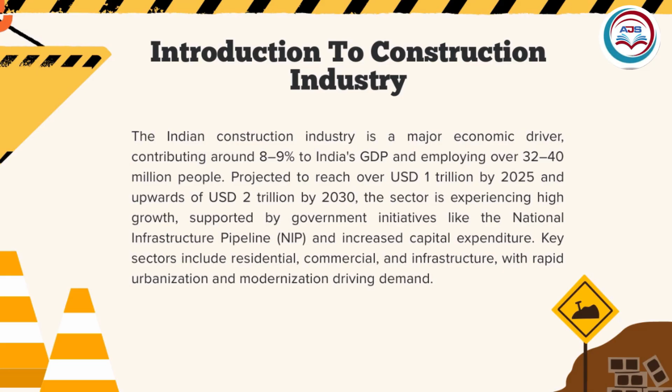Government programs like the National Infrastructure Pipeline are fueling this growth, along with rising investment. Residential, commercial, and infrastructure projects are all booming, driven by rapid urbanization and modernization across India. Let's break down the key subsectors of the construction industry.

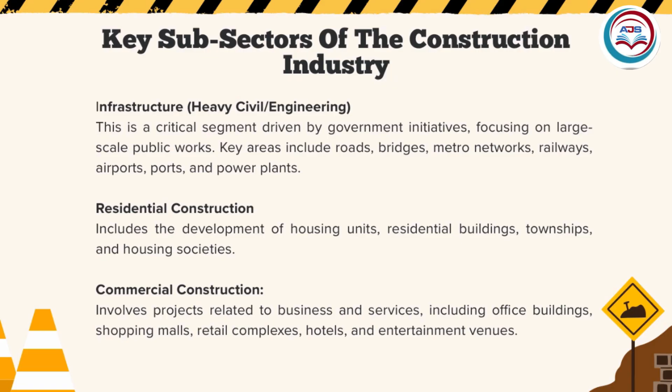First, infrastructure. This is the backbone of public development, driven largely by government projects. Think roads, bridges, metro systems, railways, airports, ports, and power plants. Next, residential construction, where we build homes, apartments, townships, and housing communities. Finally, commercial construction, covering spaces for business and services, like office buildings, malls, hotels, and entertainment centers. These three areas shape the built environment we live and work in every day.

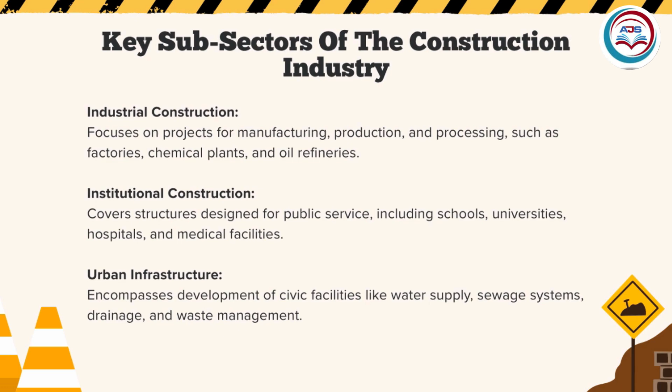Let's break down the key subsectors within the construction industry. First, industrial construction. This is all about building facilities for manufacturing and processing, like factories and chemical plants. Then, we have institutional construction, which focuses on public service buildings, schools, hospitals, universities, and medical centers. Finally, urban infrastructure covers the essential civic systems we rely on every day: water supply, sewage, drainage, and waste management. Together, these areas shape the built environment around us.

When we talk about the role of a helper mason, it's all about supporting the core tasks on site. That means mixing cement, mortar, and concrete with precision, following instructions to the letter. It also involves handling materials, loading, unloading, and stacking bricks, blocks, tiles, and stones close to where they're needed. Preparing the site is key too, clearing work zones, dressing soil, and setting up or taking down scaffolding safely.

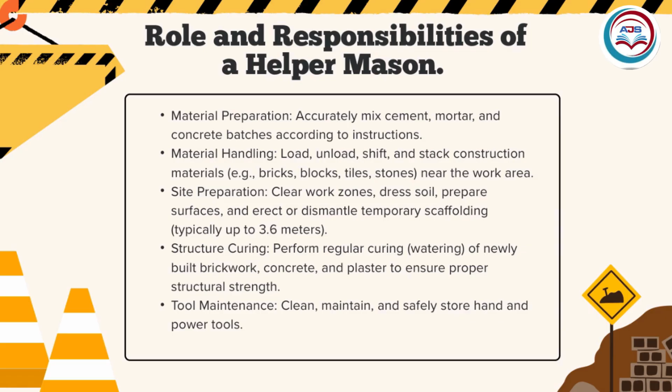Then there's structure curing, which means regularly watering new brickwork and concrete to build strength. Finally, keeping tools clean, maintained, and stored safely rounds out the job. It's a vital role that keeps everything running smoothly.

Let's get familiar with some basic brick and block terms you'll hear on any masonry site. A stretcher is a brick laid flat, with its longest side facing out. A header shows the shorter end on the wall's face. Then there's the soldier, a brick stood upright, often for decoration or arches. The frog is the little indentation on top, helping mortar grip. A bat is just a broken piece of brick, and quoins are those big, strong corner bricks that finish off the edges.

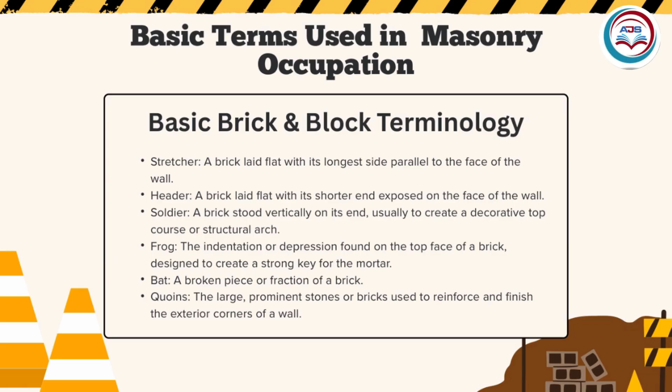Let's break down some basic terms used in masonry, the language of building with bricks and stones. A course is simply one horizontal row of bricks or blocks, all laid in mortar. The bed is the fresh mortar layer beneath each course, where the bricks rest. Then there's the bond, that's the pattern bricks follow to lock together, avoiding straight vertical joints. A wythe is a single vertical thickness of masonry, and a corbel is a stepped projection that juts out to carry weight above. These elements shape how walls stand strong and last.

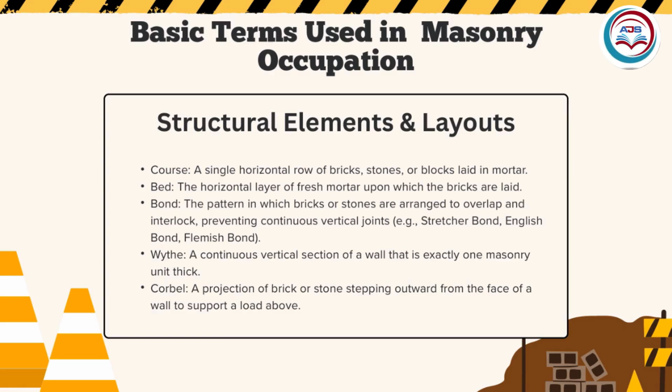Let's break down some key terms that are essential in masonry work. Mortar is the paste that holds everything together, a mix of cement, lime, sand, and water. Grout, on the other hand, is much more fluid, used to fill gaps inside hollow blocks and around steel reinforcements. Flashing is a thin layer of waterproof material that helps keep water out by directing it away from the wall. Weep holes are small openings left intentionally to let trapped moisture escape. And finally, efflorescence, that white, powdery residue you sometimes see on walls after water dries.

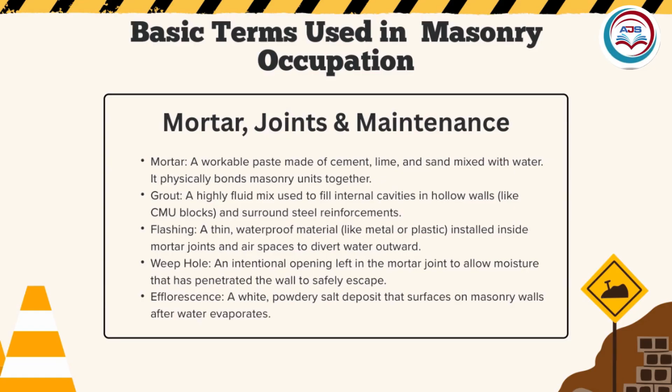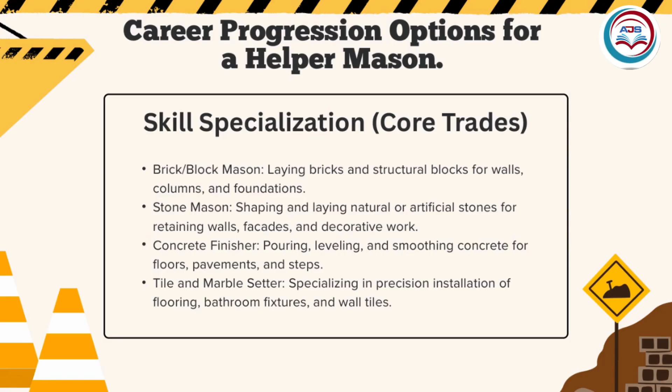Let's explore the core trades that build the foundation of masonry work. First, the brick or block mason. They lay bricks and blocks to create walls, columns, and foundations. Then, the stone mason shapes and fits natural or artificial stones, often for facades or decorative walls. Concrete finishers handle pouring and smoothing concrete surfaces like floors and steps. Finally, tile and marble setters specialize in precise installation of tiles and marble, especially in bathrooms and floors. These roles offer clear paths for career growth from helper mason onwards.